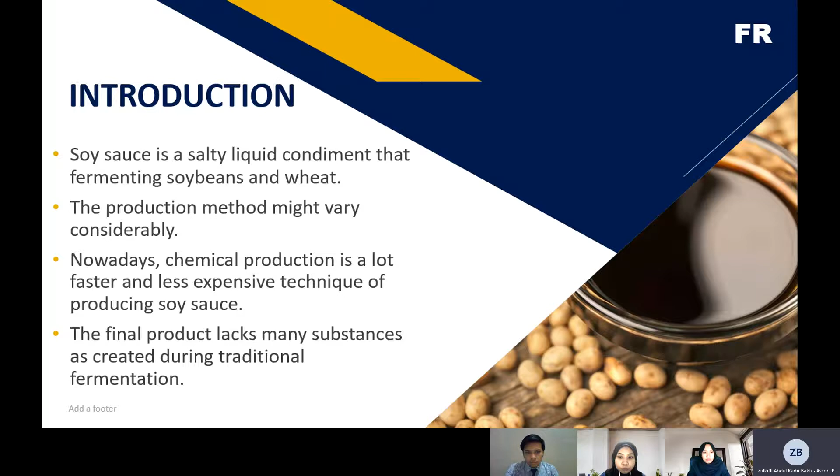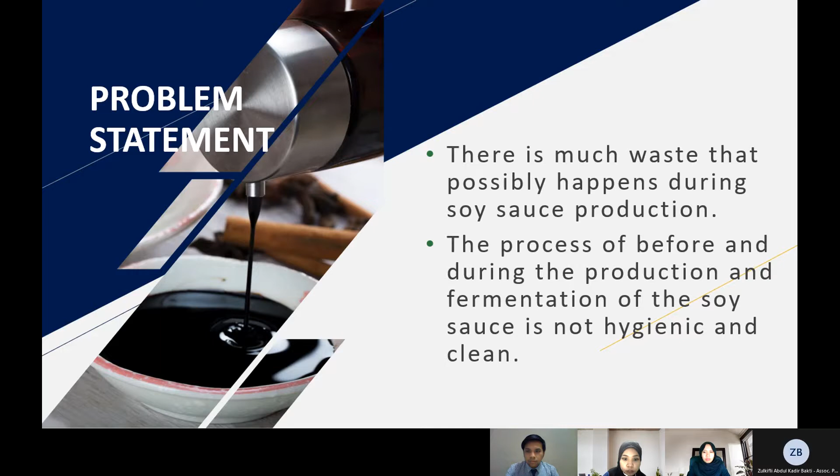For the next slide, there are two problems regarding this soy sauce manufacturing system. The first is that there is much waste that possibly happens during soy sauce production. The second is that the process before and during production and fermentation of the soy sauce is not hygienic and clean.

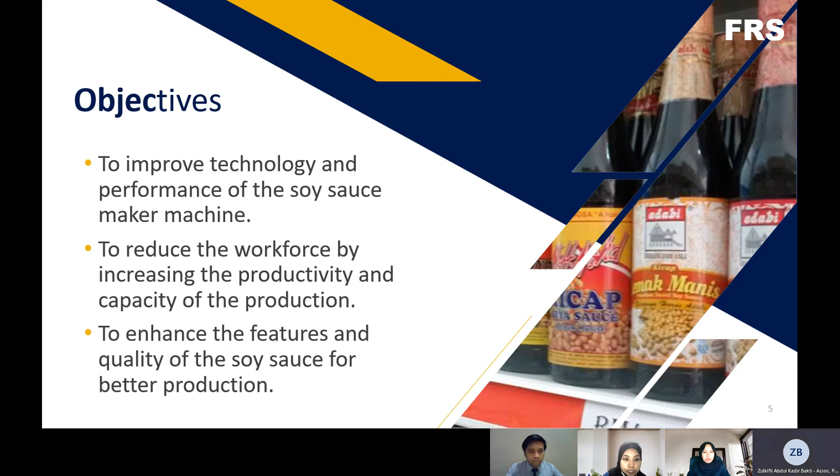For the next slide is the objective. In order to achieve our target and goals for this product, we have come up with three objectives: first, to improve the technology and performance of the soy sauce making machine; second, to reduce the workforce by increasing the productivity and capacity of the production; and lastly, to enhance the features and quality of the soy sauce for better production.

I will explain starting from the block diagram. This is the block diagram for the device that we plan to build. Starting with the sensors, there are 4 sensors that we plan to implement in the device. The first one is the temperature and humidity sensor. The second one is the turbidity sensor, which is for quality monitoring of the soy sauce liquid in the process.

The third one is the pressure sensor. This is the sensor we plan to put at the hydraulic press, to monitor the pressure process of the hydraulic press that will press the liquid from the soybean. And the last one is the flow and level sensor.

All the sensors will go into the microcontroller, which we discussed and agreed to use the NodeMCU. Then the power supply will supply power to the microcontroller, and the connection will go to the IoT cloud for the user. All of the sensors will go to the output devices, which are the mixer motor in the fermentation tank, the hydraulic press, and also the solenoid valve.

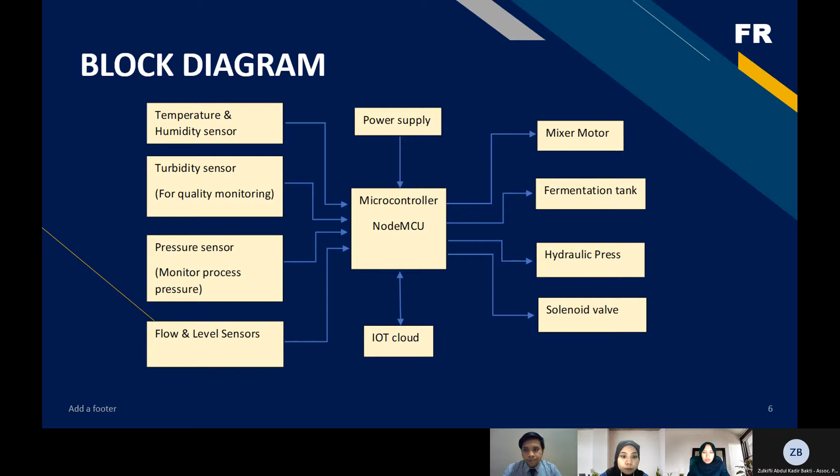Okay, next, this is the context diagram for the process. Starting from the beginning is the microcontroller with its sensors: the temperature and humidity sensor, the pressure sensor, and the flow and level sensor. This will go to the process, and the process will divide into four tasks.

The temperature and humidity sensor senses the right level of temperature and humidity in the fermentation tank. The second is the pressure sensor, which senses the hydraulic press and monitors when pressure is applied to the soy. Next is the biosensor, which measures the quality content in the soy sauce to observe the quality of the soy sauce liquid. And the last one is the flow and level sensor.

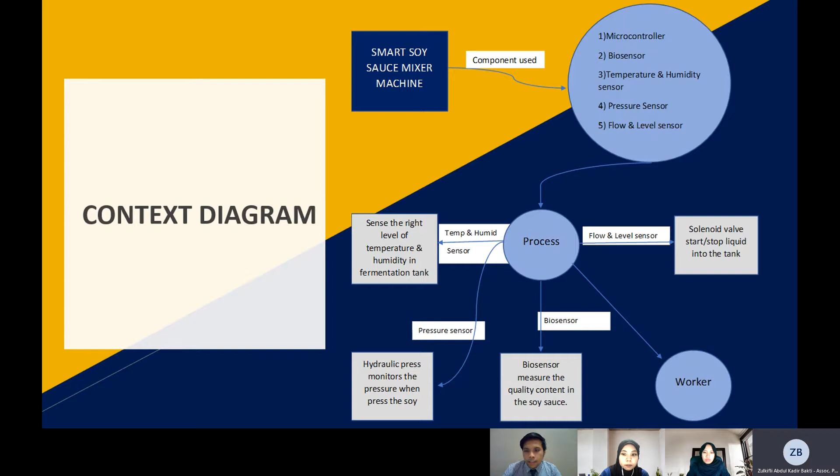The flow and level sensor is used at the beginning of the process, and the solenoid valve will start and stop the liquid that puts the ingredient into the tank. All of this will go to the worker for observation.

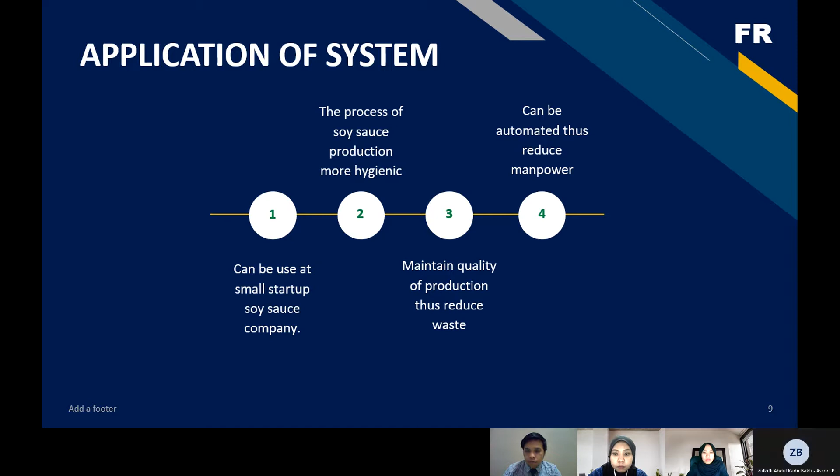Okay, next is the application of our system. The first one is it can be used at small startup soy sauce companies. The second is that the soy sauce production process becomes more hygienic, maintaining the quality of production and thus reducing waste. The last one is it can be automated, thus reducing manpower.

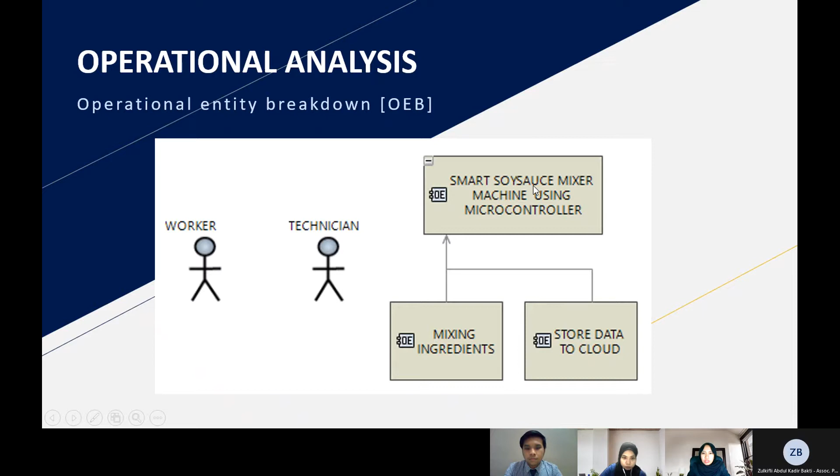Now I will explain the operational analysis. The first is the operational entity breakdown, the OEB, where the operational actors are the workers and the technician, and the operational entities are the smart soy sauce mixer machine using a microcontroller, which mixes ingredients and stores data to the cloud. The smart soy sauce mixer consists of mixing ingredients and storing data to the cloud.

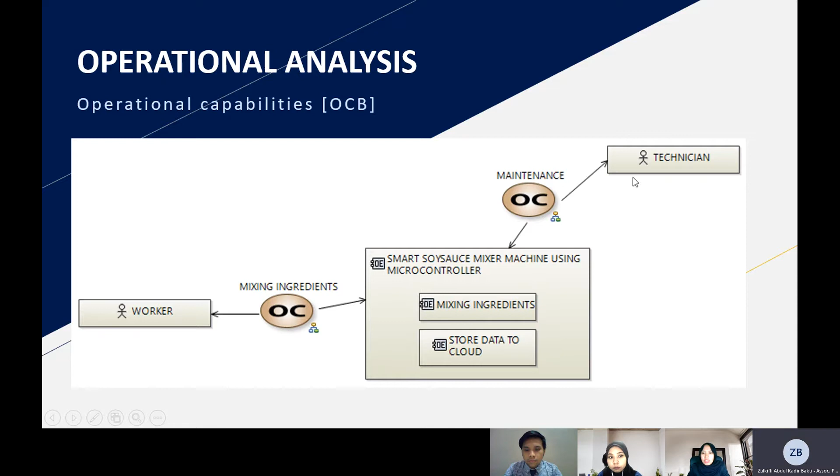Now for the operational capabilities, the OCB. There are two operational capabilities, which are mixing ingredients and maintenance. The mixing ingredients capability involves the worker and the smart soy sauce mixer machine using the microcontroller, while the maintenance capability involves the technician and the smart soy sauce mixer machine using the microcontroller.

We'll proceed to the operational entity scenario, OES. As mentioned, there are two operational capabilities: mixing ingredients and maintenance. I will focus first on mixing ingredients, which is between the workers and the smart soy sauce mixer machine. First, the workers will turn on the system in order to switch on the machine. Then the machine will be initialized.

This is where all the sensors will be calibrated, and it will check the amount of ingredients before mixing. After the machine has initialized, it will start mixing all the ingredients in order to make the soy sauce.

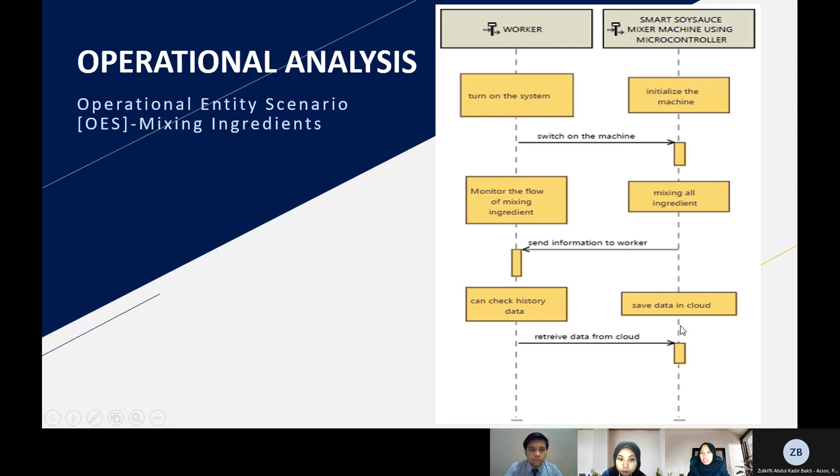Then it will send the information to the worker in order to monitor the flow of the mixing ingredients. At the same time, the workers can also check the history data retrieved from the cloud, where the data is saved in the cloud from the machine.

Now for the OES for maintenance, between the technician and the smart soy sauce mixer machine. The technician can set up the system in order to test run the setup before the machine can run to mix all the ingredients.

The technician also has to maintain the system if it encounters a system breakdown, or before the machine goes into breakdown, in order to make the machine run smoothly throughout the process.

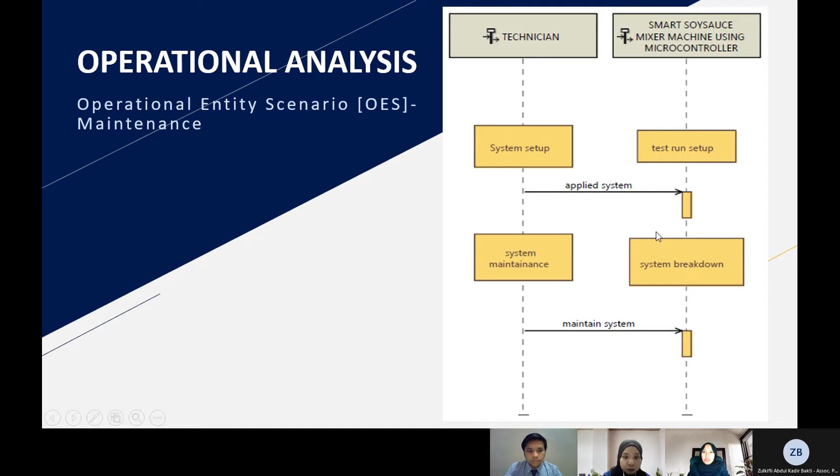This is the operational analysis of the operational architecture diagram, OAB. You can see here there's workers, the smart soy sauce mixer machine, and also the technician. These are the activities extracted from the previous operational entity scenario.

Before initializing the machine, there will be a read sensor, as mentioned before at the context diagram. The read sensor checks the amount of ingredient, and the history can also be retrieved from the data cloud.

You can also see here the involvement between the technician and the machine in order to set up and maintain the system before the machine can be run and before the machine breaks down.

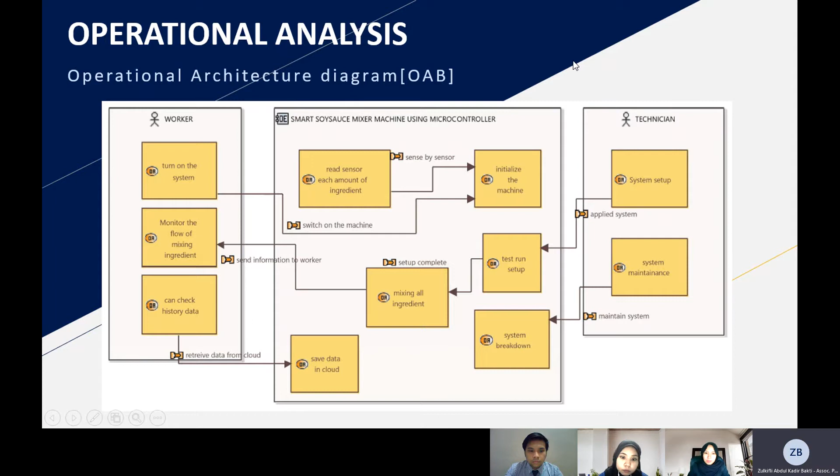Last but not least, the operational activity interaction diagram, the OAIB, throughout the process. As you can see, the OAIB is used to model and display the operational interactions, as we have already defined the interactions through the scenarios, and it displays the existing interaction.

This is the activity boxes after relocating them in the working area. It also allows us to define the operational process of the operational activities and the interactions, where the process is linked between the activities.

For example, here is the system maintenance and the system breakdown for the maintenance process. Here is the storing data process, where the data is saved in the cloud and can also be checked as history data. Next is the setup process, where the system is set up in order to run the setup.

Then the mixing process, where it will mix all the ingredients and monitor the flow of mixing. Lastly is the starting up process, turning on the system and initializing the machine.

Also, the machine is read by the sensor to measure each amount of the ingredient.

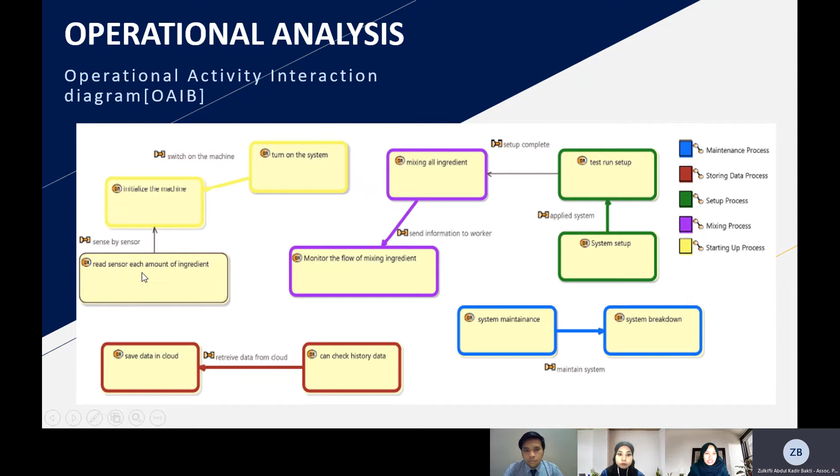Now I will explain two types of architecture for this product. The first one is physical architecture, which consists of views of the physical solution. By referring to our block diagram, we have come up with the analysis for the physical architecture.

For the physical architecture, the flow starts with the microcontroller and proceeds to the flow and level sensor, then to the solenoid valve, next to the mixer motor, and for the fermentation tank, we need a biosensor to measure its value. Before leaving the process, we need a hydraulic press and pressure sensor before it can reach the user interface.